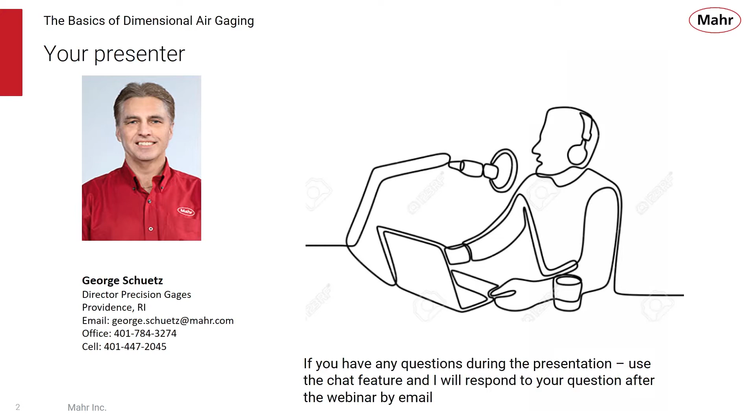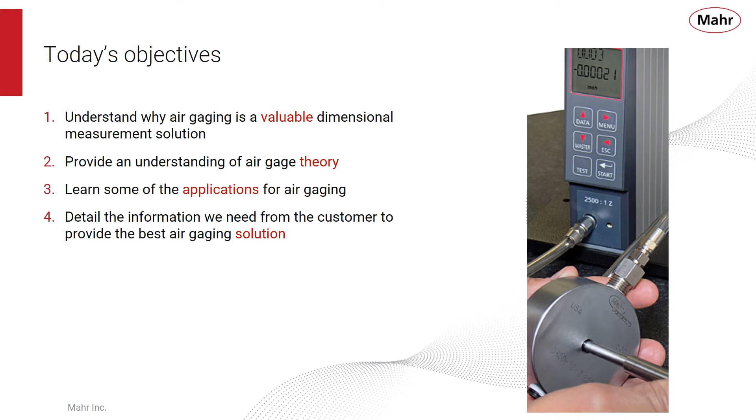The objectives for this webinar are to understand why air gauging is a valuable dimensional measurement solution. It'll help provide an understanding of air gauge theory, and we'll learn about some of the applications for air gauging. We'll also get you the information needed to provide an air gauge solution to meet the customer's requirements.

Air gauging was first sold and developed in the 1940s. It's the first truly high-performance tool for the shop floor, bringing 50 microinches or 1 micron or better measurements to the point of manufacture. And it's even more important today as tolerances are getting tighter and tighter.

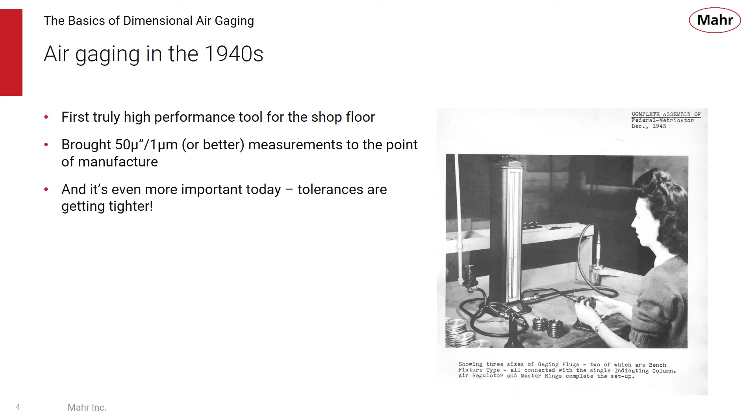Why use air gauging? Well, air gauging is a measurement system that allows for fast measurement. Because the plug is made to the bore being measured, it's self-aligning. There's little operator influence with an air gauge. It gives you high performance, again 0.1 microns or 5 microinches. It's a non-contact system, using back pressure as the measuring medium, so it won't mar the part that's being measured. And because air is passing through the tool, it tends to clean away any surface contamination.

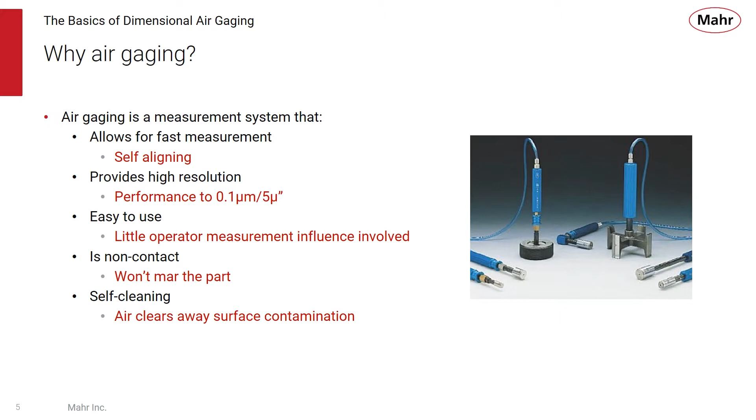When do we like to use air gauging? Well, when tolerances are tight, less than plus or minus 40 microns, or plus or minus a thousandth and a half of part tolerance. These are good applications for air gauging.

Because it's a variable gauging system, it lets us know the deviation from the nominal size. So it tells us not only if the part is good or bad, but also how good or bad the part is.

Because it's a fast measuring system with minimal operator influence, it's a great tool for measuring a high volume of parts very accurately and quickly.

But we can also use it for geometric measurement, not only high volumes, but if a part is too big for another means to get a tight tolerance dimension, say like a large aircraft transmission housing where there's some large diameters, that part might be very valuable, and air gauging might be the right solution for that. Measuring geometric conditions like taper, straightness, and center distance are also great applications for air gauging. Or if we're at the point of manufacture where the environment is dirty, air gauging is a good tool for that also.

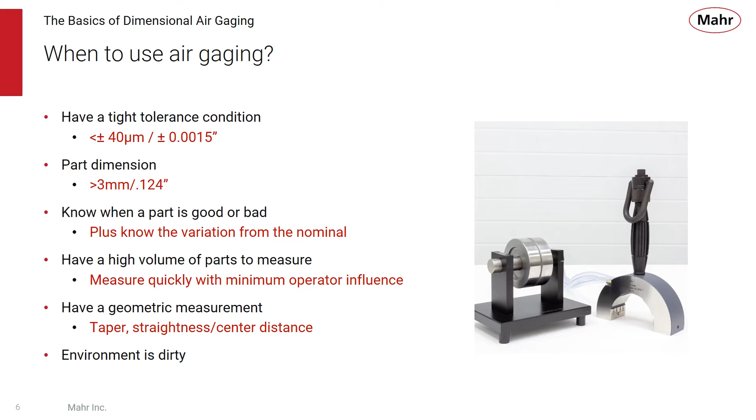Is air gauging difficult to apply? Well, not really. Air gauging is often no different than selecting an adjustable bore gauge, a fixed mechanical plug, or even a snap gauge. You need to know the same information: what's the size, what's the tolerance, where is the measurement being made. And in the air gauging world, we also like to know what the surface finish of the part is.

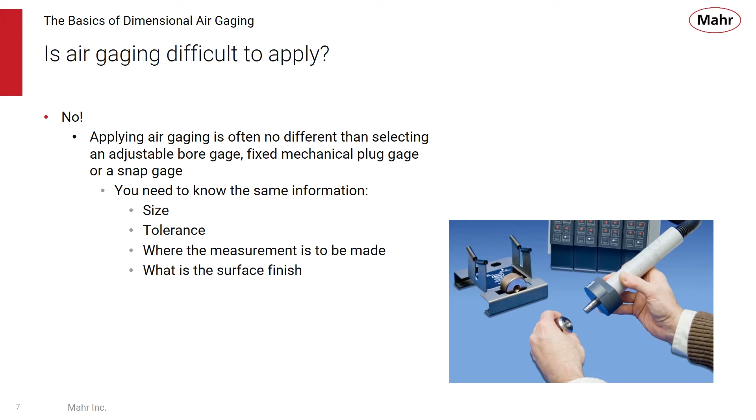This is very important. Air gauging is made for the application. It's made to a specific size. So if there was a mistake in specifying the tooling, it could result in an unusable measuring system. It's important to get the information right when applying air gauging.

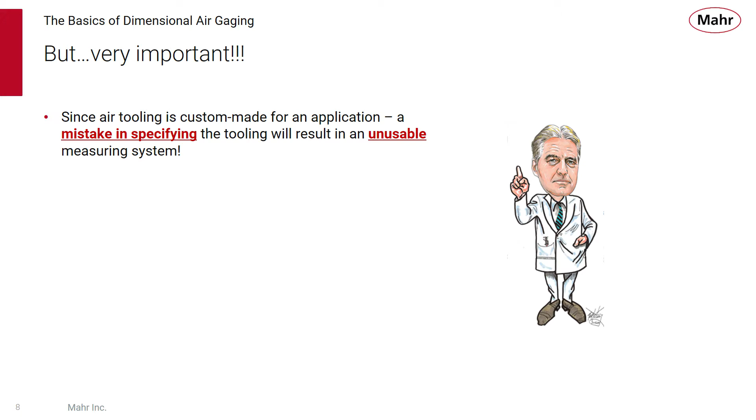So what are the principles of air gauging? Well, air gauging works on back pressure. If you think of taking a garden hose full of water and holding it against the wall of a building, what happens? The closer and closer you get, the spray gets spread out to the side, and eventually you're going to close off that nozzle.

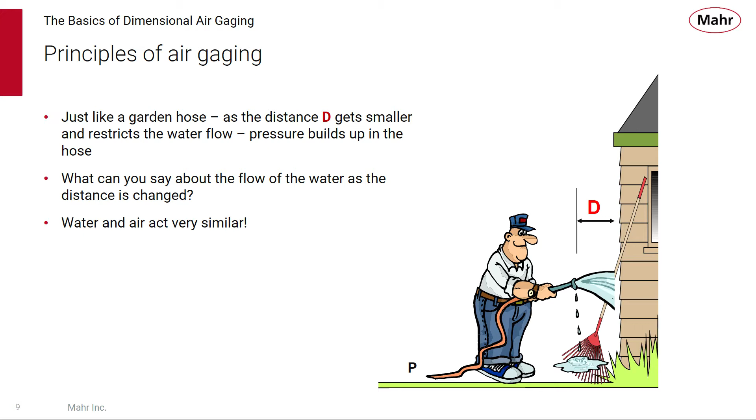Two things are happening there: you're closing off the distance, and the pressure in the hose is building up. We use that same type of back pressure or flow for air gauging. In the case of the water flowing through the hose, or the air flowing through an air tool, the further you get away from the surface you're measuring, the bigger the flow. And the closer you are, the smaller the flow.

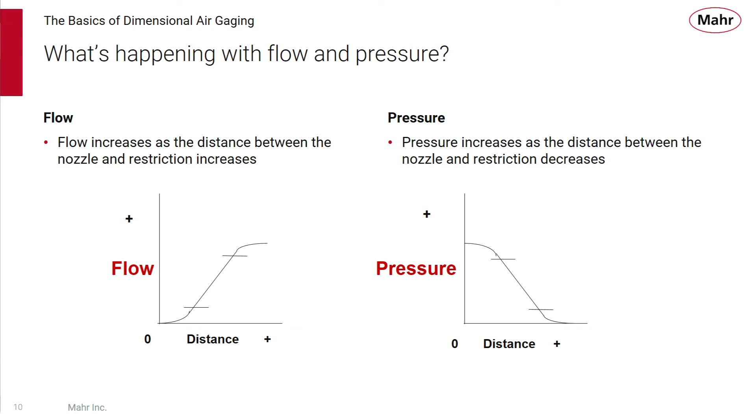The opposite happens with air pressure. When that jet is closed off or that nozzle is closed off, the hose sees the highest pressure, and the further away you get from the surface you're measuring, the pressure gets less. So we use these pressure distance curves to measure with air gauging. You restrict the flow, or restrict the nozzle, you have the highest pressure. You open up the nozzle, you have the lowest pressure. So we can use that.

Now, if you plotted those things out, you would see that pressure distance curve, and you would see that there's a nice straight position or portion of that curve, which is the linear area, and that's the area we can use for our pressure distance measuring system.

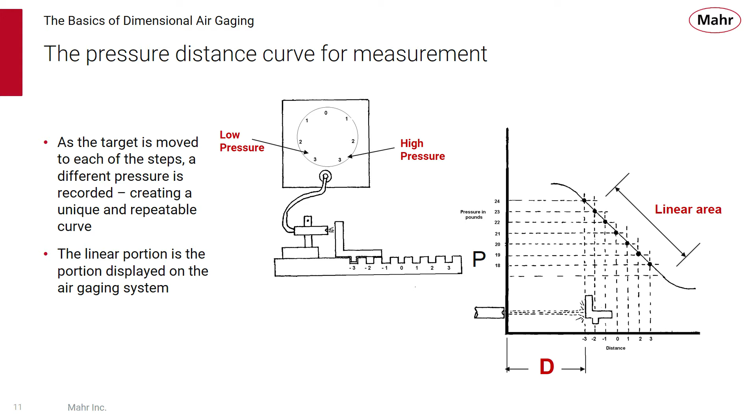But it all comes down to the jet, that little orifice that's in the air tool. Usually in an air plug, there's two of them - it's a two-jet system. And when the air flows through that and it's restricted by the surface being measured, it builds up that back pressure. So as the air jet is restricted, we are measuring what is happening to the air in the system. We're measuring really the back pressure.

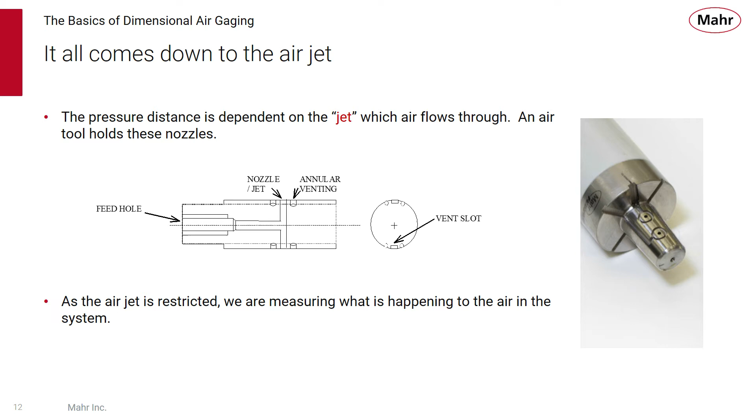When we control the air pressure, the manufacture and position of the air jet, the manufacture of the air plug, and calibrate that system to a pneumatic zero, we can create a curve that's very repeatable. This is the basis for all Mahr air gauge systems.

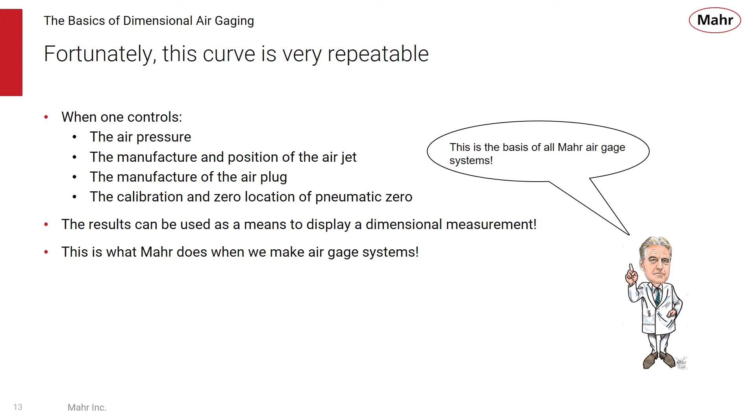The results can be used to make measurements with that back pressure on a display and get very good results. This is what Mahr does when making an air gauging system. We control all the components of the system: the air plug, the air display, and the master.

To go one step further, Mahr uses a balanced air system. We don't just measure the back pressure through the restriction. Instead, we create a balanced air system which has a reference leg. As the air comes in through the filter and regulator, it's broken into two legs: a reference leg and the measuring leg where the air tooling is at. We compare the reference channel to the measuring channel and look at that difference. That's what's actually giving us the measure, and this eliminates any small changes in air pressure that could affect the measurement results.

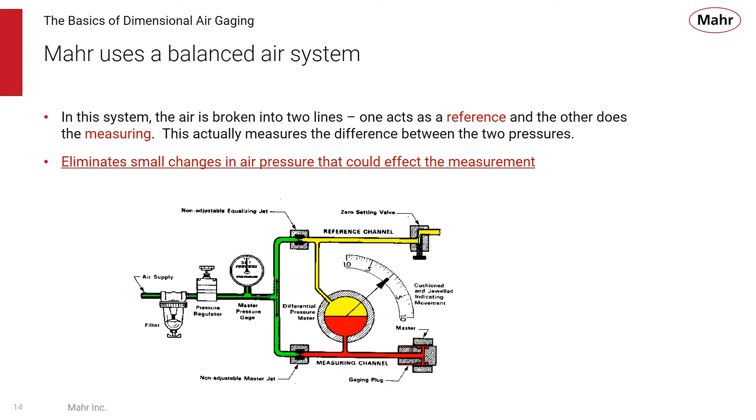An air system consists of the air tooling, the readout system, and the master. Mahr manufactures those three components, giving us a fast measuring system that's easy to use, highly accurate, with good resolution, non-contact, and ideal for working in the shop environment.

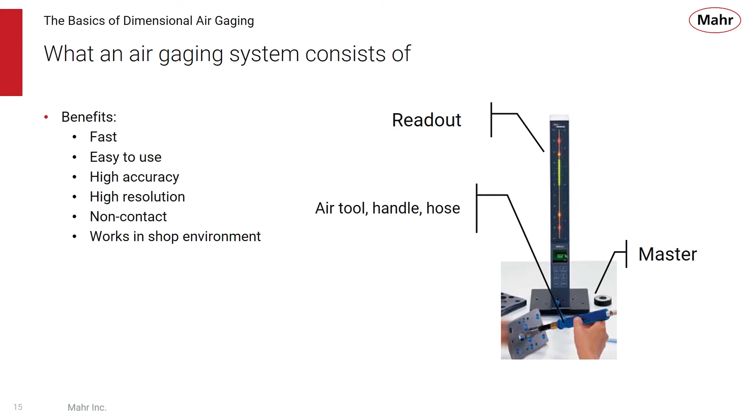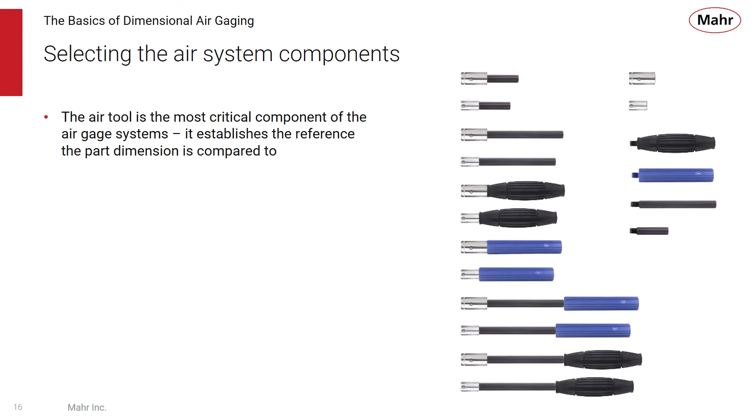I'll start looking at those three portions of the air system, the components. The air tool is probably the most critical component in the air gauge system. It establishes the reference from which the part dimension is compared to.

So what makes up that air plug or the air tool? Well, the air tool is nothing more than a hardened steel cylinder with some air passages and opposed jets. The air goes through the plug and comes out through those jets. The proximity of the part to the jet throttles the airflow, resulting in pressure changes, and an air gauge instrument measures that pressure and displays the part size.

The air jet is a small hole, basically about 1 millimeter, a little bit more, or 50 thousandths of an inch in diameter. The air flow comes out those jets, and the part throttles those jets to give us the back pressure.

Air has to fill in those peaks and valleys if that surface on the part is rough, to give us our back pressure. So if that surface is very rough, we're actually going over the diameter of the jet and having to fill in that area of the peaks and valleys. If the surface is too rough, we might see a little bit of offset.

You can imagine that a contact gauging system is only going to ride on the high parts or peaks of our surface. So if the surface is rough, we might get a deviation between an air gauge system and a contact probe system. That's why we like to know the surface finish of the part, just to ensure we get good correlation between the different types of measuring systems.

So if you're measuring a tight tolerance, it's important to know and understand the surface finish of the part.

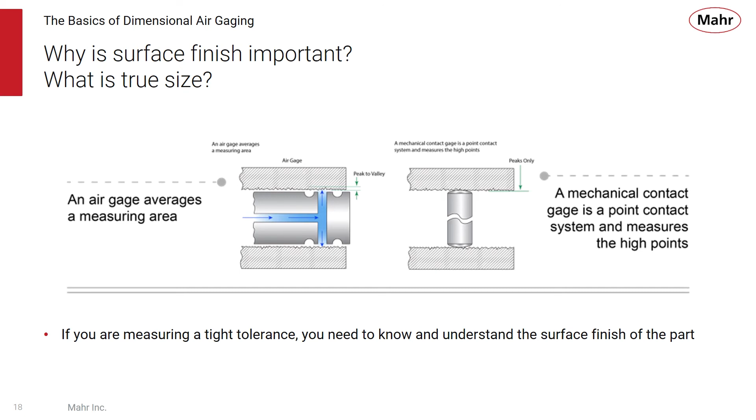Air plugs are by far the most commonly used air gauges, and with their 2-point measuring system or 2 jets, we can measure the diameter of a hole. But by exploring the hole, rotating the plug, and moving the plug axially along that bore, we can look for things like ovality, barrel shape, taper, or even hourglass shape within that part. So making dynamic measurements, you can know what's going on with your bore.

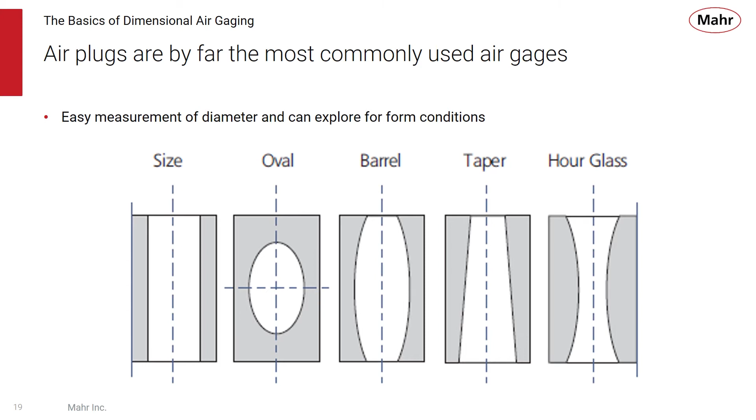Plugs come in various ranges of body styles and so forth. Typically they're 2-jet systems, but you can put those jets in the middle of the plug or at the end of the plug to make a through jet system, or a blind, or even a super blind air plug to get really close to the bottom of the bore. We can also make plugs with very long lengths, a continuous body length, for example, to go over steps or land within a bore.

We can even add stop collars to ensure that the jets land at a specific depth or on a short land. We mentioned most plugs have 2 jets, but we can also have a 3-jet plug when we know there's a form error, an odd number of lobes in that part. A 3-jet air plug will allow us to find that odd lobe condition.

Or we can add 4 or 6 jets and come up with averaging of the bore diameter. A 4-jet plug will average an even lobe condition, where a 6-jet will give us an average of 2 and 3 lobe roundness condition. So the number of jets can give us more information about the diameter of the part.

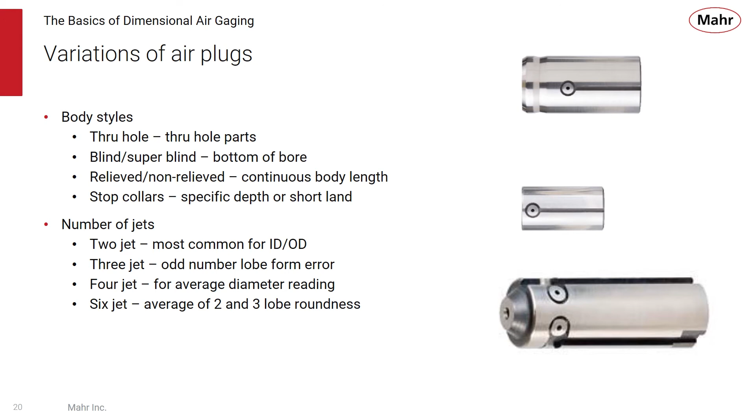Now we can also make air tooling to measure ODs. You can get air rings with configurations for 2 or 3 jets. You can put the jets at various locations from the face of the air ring, and you can make that air ring either a bench or a portable measurement solution.

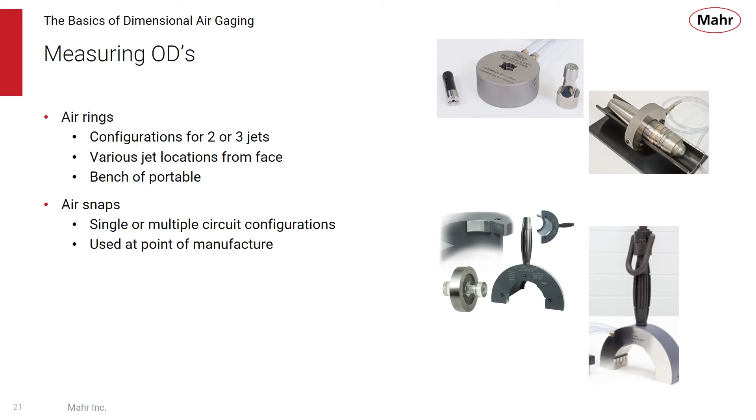And then you can also make air snaps for measuring ODs on the part as they're being manufactured. And of course, you can get single or multiple circuit configurations in air snaps. Like I said, it's often used at the point of manufacture on the machine tool while that part is still being manufactured.

Probably the greatest feature about air gauging is the jet itself, the sensor. It's very small and they can be positioned very close together. There's probably no other sensor that can do this at the cost or within the small area of an air plug. Typically, jets can be put as close as 0.1 inches together, but sometimes they can be even closer.

This provides us the capability of doing multiple dimensions or geometric checks in a single tool. No other sensor has the capability of doing that at this type of cost.

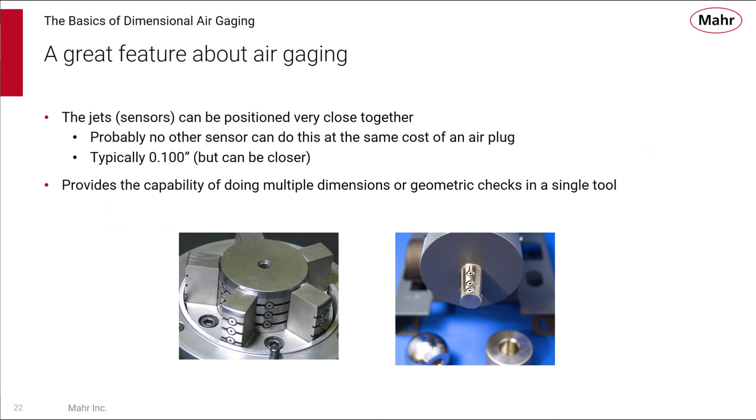So tapers are a great application for air gauging because we can measure two diameters in a very small hole at a known distance and calculate the taper angle.

And where are tapers used? Well, they're used for machine tools, for holding the spindles in place. They're also used in the medical industry. All your hips, shoulder components, those are all locked together using locking tapers. And often they are very small, less than a half-inch diameter, for example, but we can make air tooling to measure those tapers.

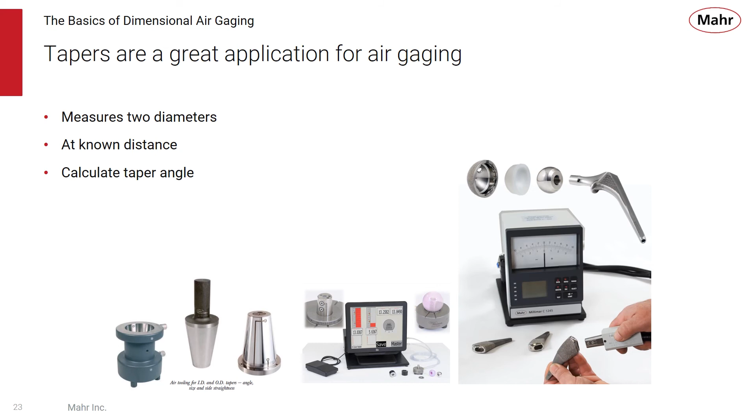And then once you have the tooling, you need some type of display option. Whether that be a mechanical dimensionaire, our portable micro dimensionaire, column gauges, our N1700 PC with cockpit software, or full-blown gauging computer applications, we have a number of display options to be used and provide the results the customer needs.

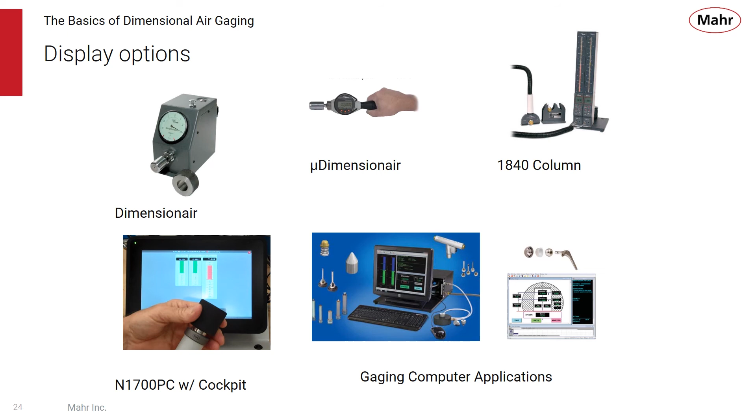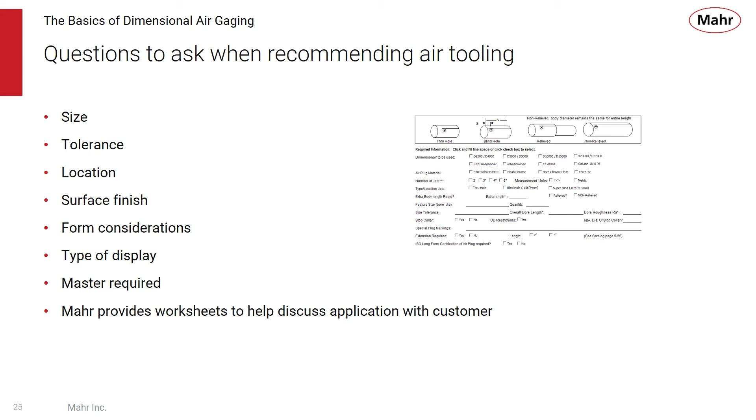Now, when we're talking about air tooling, again, you have to know the size, the tolerance, the location of the dimension being measured, the surface finish, form considerations, the display, and the master being required. And Mahr manufactures all these components, the masters, the type of display, and the air tooling. So we know the whole air system and we build the accuracy into each one of those components.

When you're using air gauging, there's some things to be considered to get the best and most reliable measurement. Air gauging is very stable, but again, it's always good practice to verify the zero position occasionally. This is based on the number of parts and the critical nature of the tolerance, and also the environment. We want to make sure that there's no temperature expansion going on.

The air pressure in the air tooling is sufficient to remove liquid contamination from the parts, but it's always wise to clean the part before it's being measured. The same thing with the master. The master and the workpiece should be at the same temperature. We don't want to get a part off the machine while it's still warm and measure that. Let it stabilize a little bit and ensure that it's at room temperature.

So we want to remove any of the non-fluid dirt from the part, so wipe the part. And it's also a good practice when the air plug is bench mounted to rotate it every now and then to minimize wear. We recommend that the jet should be at the 3 or 9 position and then rotate them occasionally to ensure that the plug body is not being worn.

Now, we say that air tooling is a non-contact system. Well, it's a non-contact system for the sensors making the measurement, but still the body of the plug is going to touch the part, and if you're measuring hundreds or thousands or even millions of parts, it's good to rotate the plug so that it gets even wear.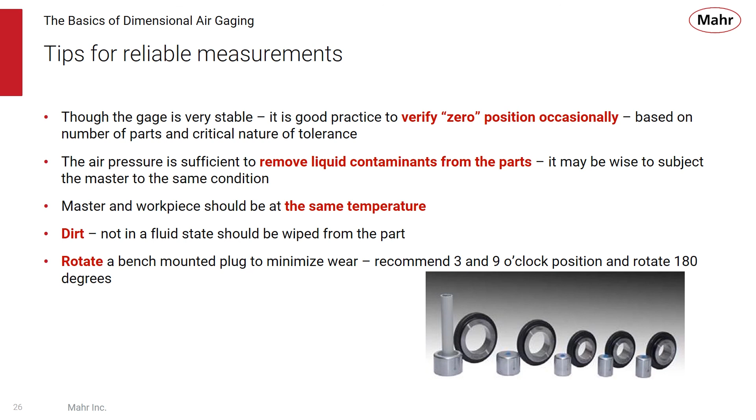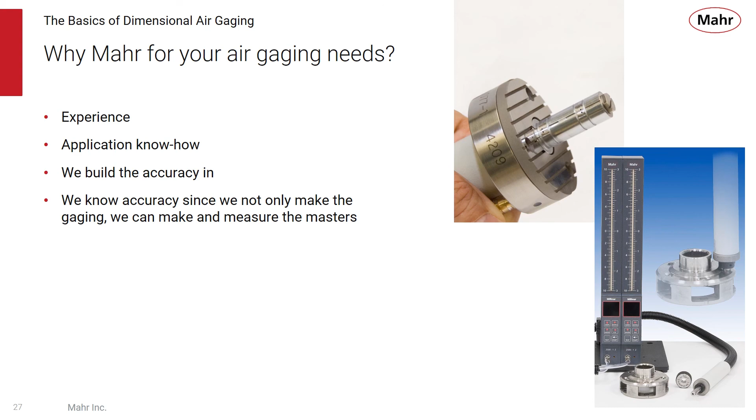So in this short time, we've covered air gauging, learned that it's been around since the 40s. It allows for fast, highly accurate, minimum operator influence measuring. Air gauging is ideal for many ID and OD type of measurement and is specifically built for the application.

Very specific information must be gathered from the user regarding the workpiece that's being measured. It's important to have that information because the tooling is custom made to the application, and we want to get it right the first time. Mahr has the experience and expertise to be your number one choice to solve your customers' or your measurement problems.